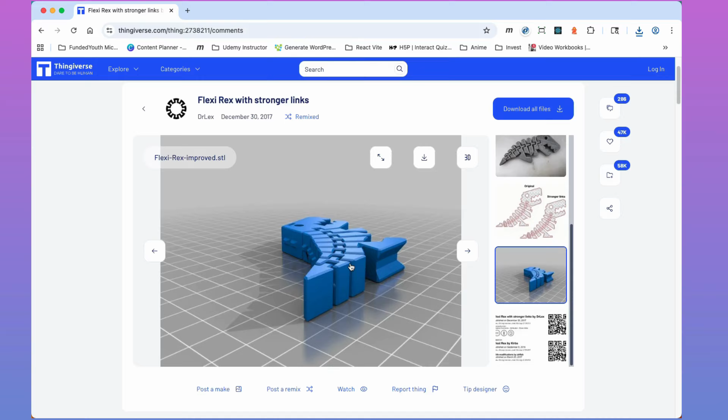If all it has is a 3D rendition of it, be very cautious, because you have an 80% chance or higher that it will fail. We've had people come in, print, and say 'oh, I like this cool-looking Groot character.' They printed it, and a couple days later they came back and it was basically a ball of stringy hair.

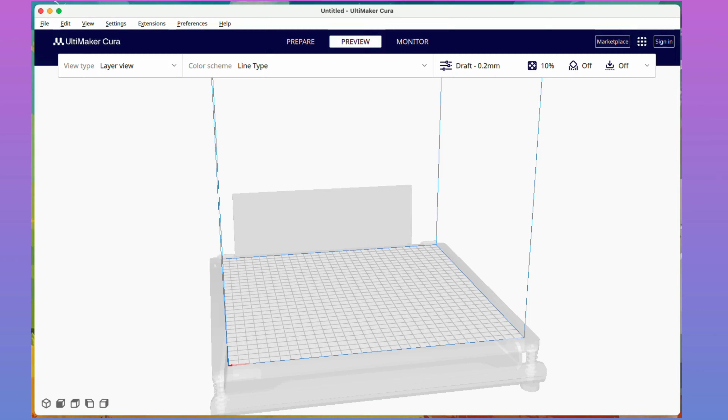Okay, now that we've got this downloaded, let's jump over to Cura. I've got it open already, and my target printer for this example is the Sovol SV06 Plus at the makerspaces - those are the open framed ones that we have available there.

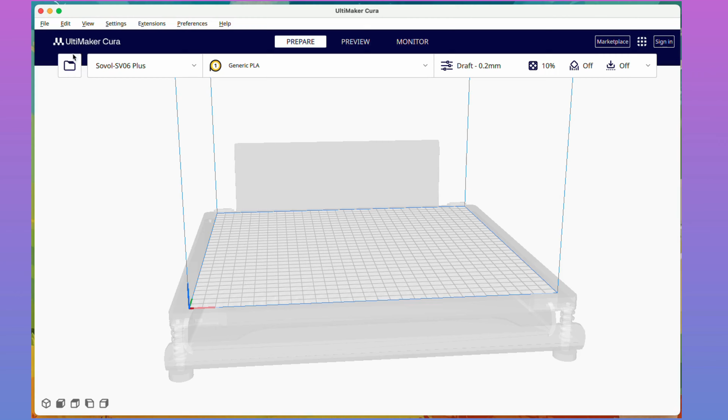Once you're here, you can drag a file onto here that's an STL. You can go up to the file and say open files, or you can click on the folder, which is usually the easiest way of reference, and find your file on the computer that you downloaded. So here's the Flexi Rex improved, I'm going to open that up.

The next thing I'm going to do is for the makerspace - the makerspace alone, you don't have to do this if you're at home, this is just for the makerspace. Just click on the little edit here and put your name in front, maybe include an initial, whatever it may be, so that when we print it, if say the sticker disappears on the machine with your name on it, we know who the print was for.

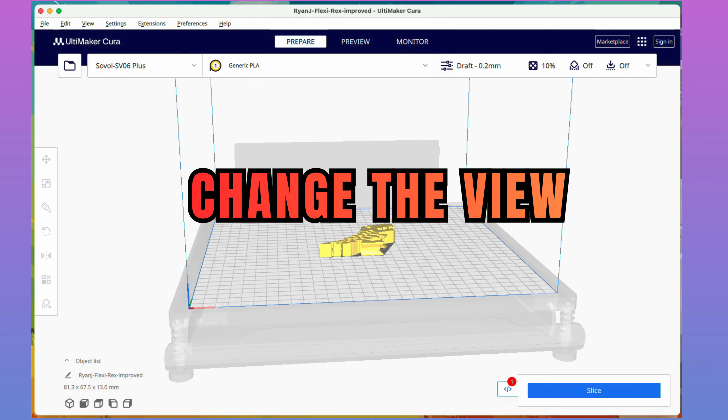The next thing we want to do is cover moving around on the screen right here and rotating, so we can see different angles of the object. There are pre-configured angles from right, left, top, and back. So if we click on any one of these, or front, it'll show us different angles by default.

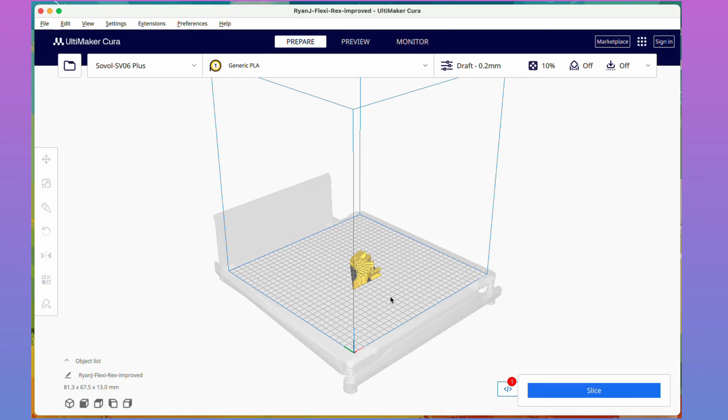On my 3-button mouse, not everybody has this, it's different on trackpads. On my 3-button mouse, if I click on the right button - yes, the right button, not the left click, but the right click - and hold that down, I can rotate around the stage. If I use my scroller wheel, I can zoom in and out. On the same wheel button, if I click on it and hold it down like it's a button, I can actually pan left to right and up and down. If I use my left button, nothing happens - this button is used for selecting the print, which we will do next.

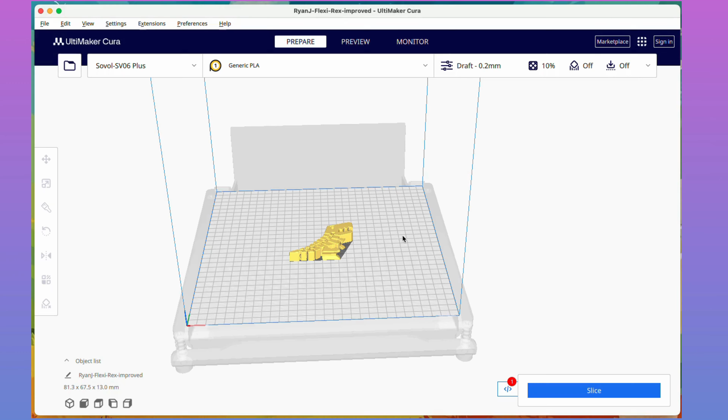Selecting the print, we initially start off with the Move tool. The Move tool has an X, Y, and Z coordinate, and it color coordinates so you understand where it's moving. Notice by default it has the drop-down model.

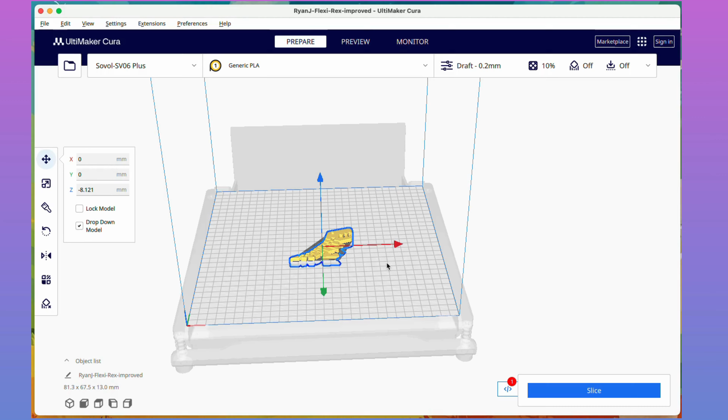What this means is if I take this on the Z axis, it will drop down to the plate, which is good. In most cases, that's what we want. However, if we drag it below the plate, anything below the plate will not print. So I'm going to undo that. And it didn't let me. I actually need to drag it above.

You can change it by millimeters, and you can lock the model, so it can't be moved. I don't know why you would do that in this case, but there's other reasons you might.

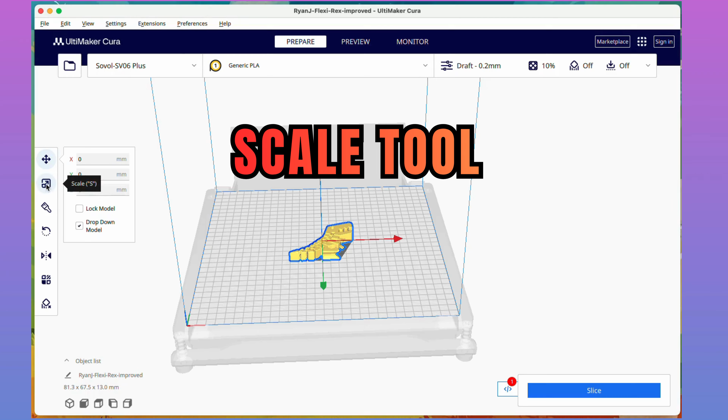The next thing we want to take a look at is the scale tool. As you notice, as I hover over this, there are shortcut keys. So we're going to click on that. By default, it has uniform scaling, so everything scales proportionally. X, Y, and Z all stay the same. It doesn't change in size in any special thing.

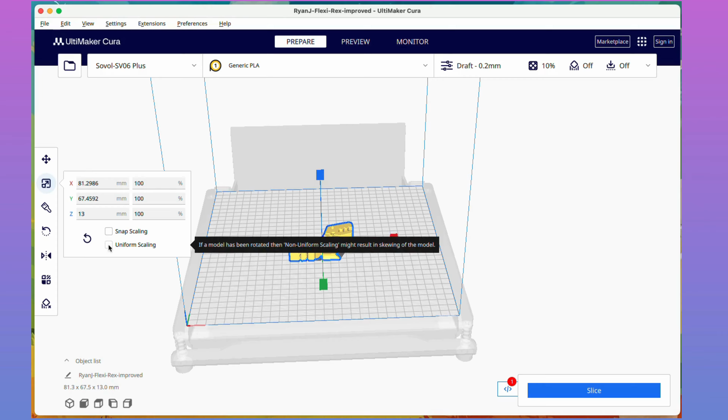For a flexi model, I would not recommend turning off uniform scaling, but you can do it. Notice I can flatten it, but this has changed, so it actually might have issues if I print it like this. So be wary. There's no guarantee it will print correctly in the way it was designed if you modify and squash it and move it around. Just be aware of that.

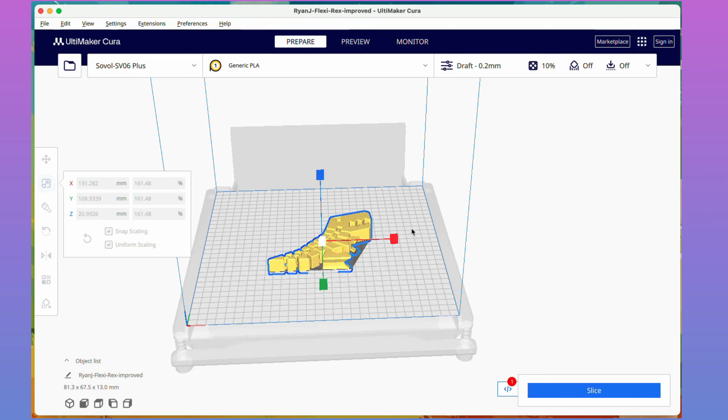You can change the percentages in here. Snap scaling - I'm going to keep the uniform back on - basically think of it as scaling to these squares based on that size. So when I scale out, notice it locks it at little jump intervals. If I turn it off, we have much more smooth scaling on this.

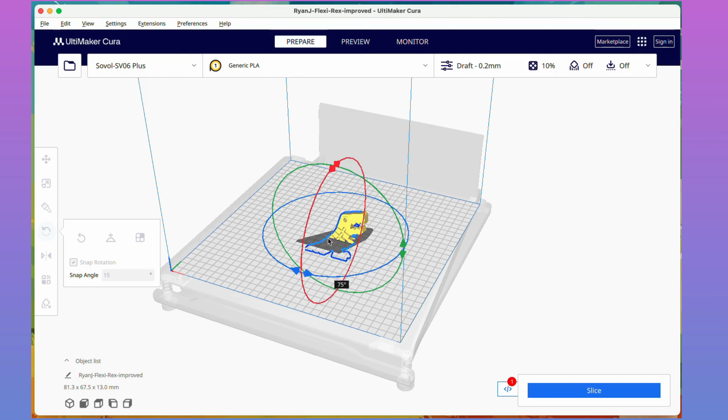Now let's jump over to our rotational tool. On the rotational tool, we can rotate X, Y, and Z, the same thing. So I'm going to rotate around so you can see this. Right now it's rotating at 15-degree angles, which is what we have over here. You can actually either set that at 0 or turn that off if you want more of a smooth rotation.

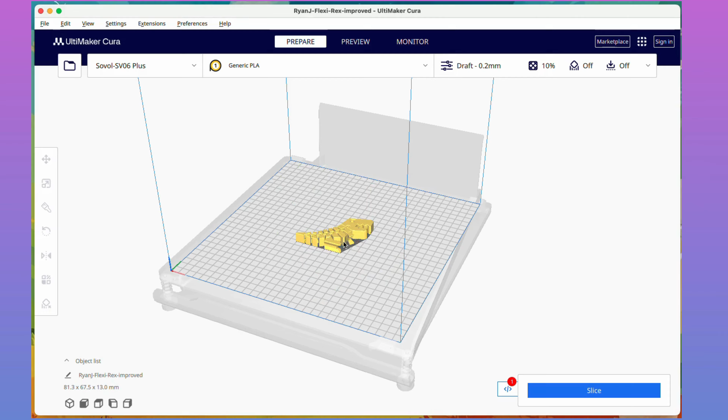Next, what we're going to take a look at, let's actually rotate this, and let's click on this one, which is lay flat. So it infers where's the best way to lay flat on this. Let's say we did it right here. Notice it stands it up. So I'm going to undo.

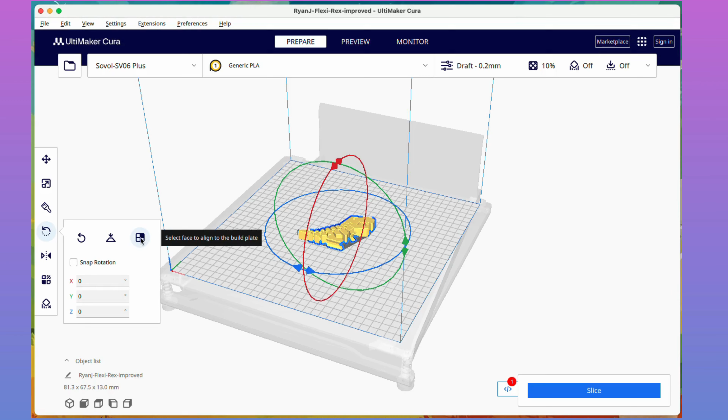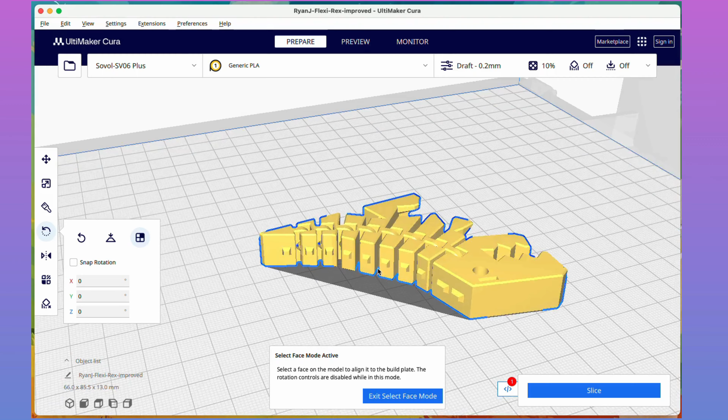The next tool on this rotation is align to face. So wherever we select this on the face, it will move it onto the print or the build plate. There we go. Sometimes it doesn't like me. There we go. Okay, so that's the basics of rotation with snap rotation.

Finally, mirror. In most cases, you won't use this unless you need to invert something, or possibly you built half of something and you need it, rather than building two parts of it like a face, you could just mirror it and print a symmetrical face. That's a good example, whatever that might be.

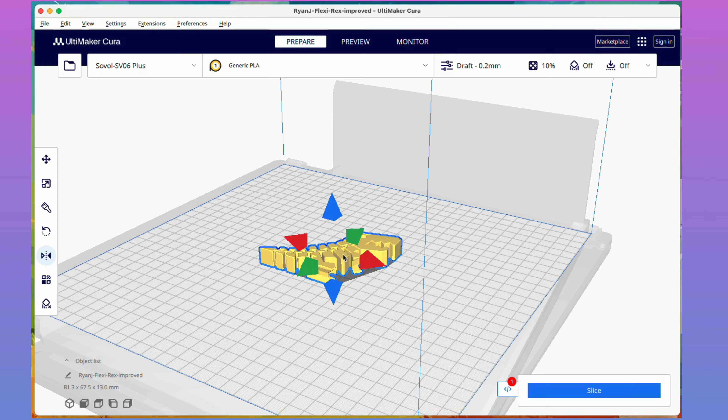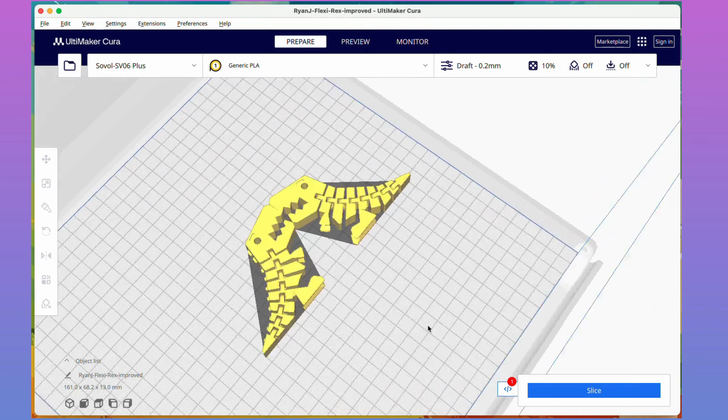Or I could have two dinos that look like they're - let's see here, if I right click on this and I say multiply by 1, okay. I could take this, rotate it, then move it. And I could do something like that, a dino bridge. All right, next.

Let's take a look at our slicing tools. So if we don't even need to select this, let's just zoom in - that's funny - and let's click on slice.

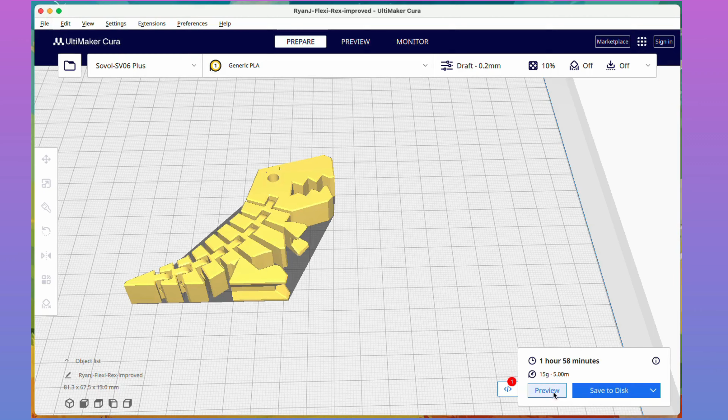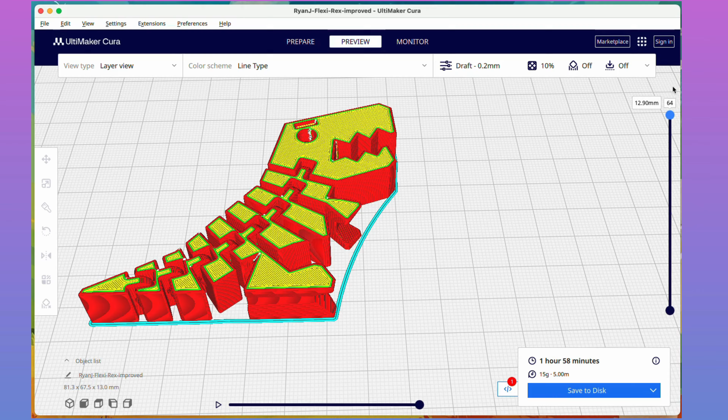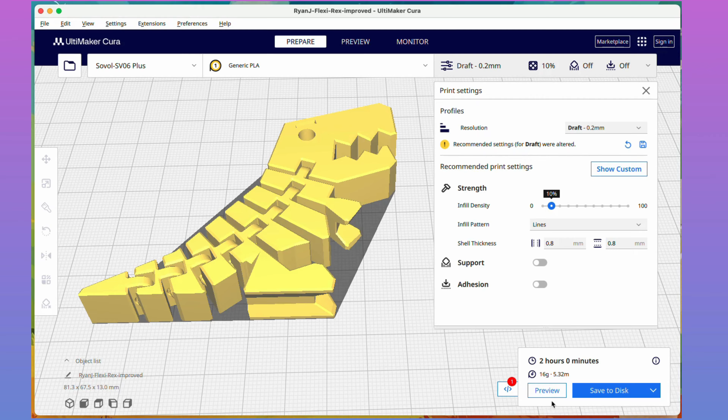We're going to click on the settings where it says draft right here, and we're going to change this from gyroid. Just as the example, most cases we actually would recommend you keep it at gyroid, but the reason why we're going to do lines is so you can see what 10% infill density with lines looks like. Remember, it was a swivel beforehand. Now if we click on preview and we change our layer lines, notice that it's actual lines here instead of swivels.

Now if we change this from 10% to something like 40% and slice again, this will change how much material is inside. In other words, the infill and how dense it is, infill density.

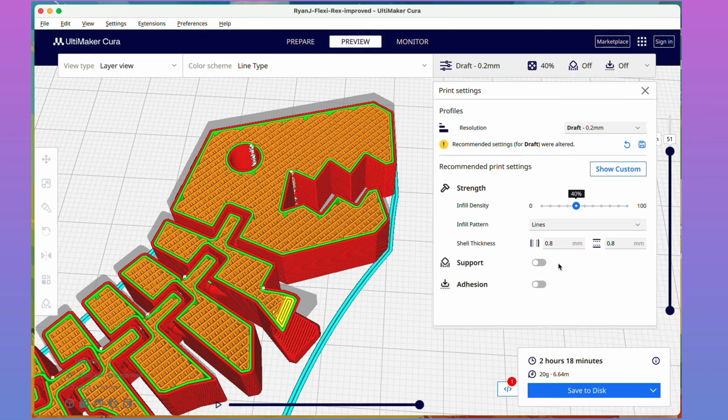The next thing we'll take a look at, we'll jump this back over to 10%, is we'll look at adhesion. So by default, in the basic environment, not the custom. The custom gets a little bit more advanced, so let's take a look at preview. There's a lot more going on here, and I haven't even revealed all the stuff that can be revealed in this, but we'll stay in here for now.

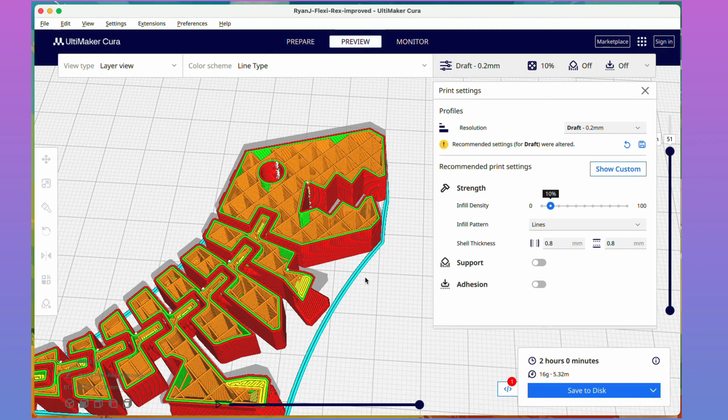This little outline that you see on the print is called a skirt. This is really good when you're printing something that's like a flexible piece, and it needs help adhering to the plate, so when the printer head is moving over and printing it out, it doesn't shift it funny. It just keeps it connected together. Not always needed, but it's good to have, at least on the Sovol printers.

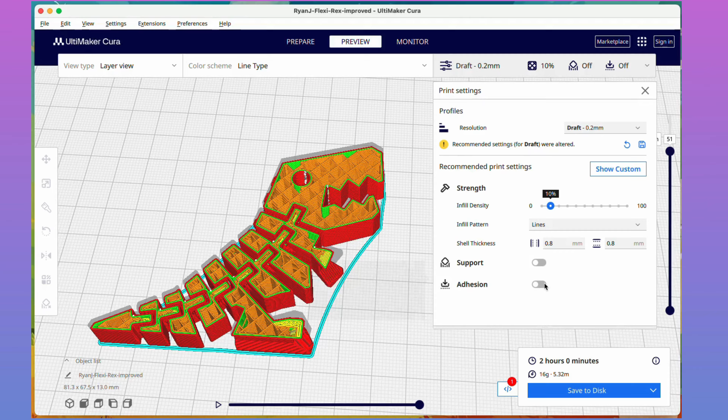Now, if you turn on adhesion and we slice it again, we get something called a brim, and this gives more adhesion. This is really good when using supports or when we definitely don't want something to move around, that we feel like it will move around.

I printed something the other day, a vase, however you'd like to pronounce that, and out of nowhere, it did not have enough adhesion. Well, it was 70% of the way, and it kicked it off the printer, and I lost that print. So in some cases, brim is very acceptable and very much needed.

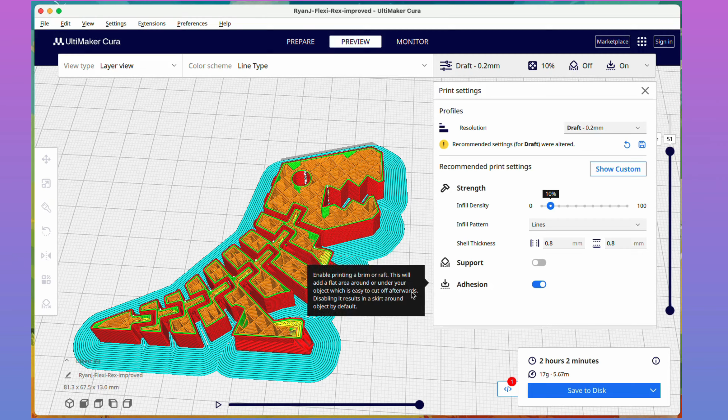For example, if we rotate our dinosaur, we come back to prepare so we can actually experience supports. I'm going to take this, rotate that, let's say like this. We got it up to our 90 degrees or close to it. And let's say supports, and we'll say normal everywhere. And we'll say slice.

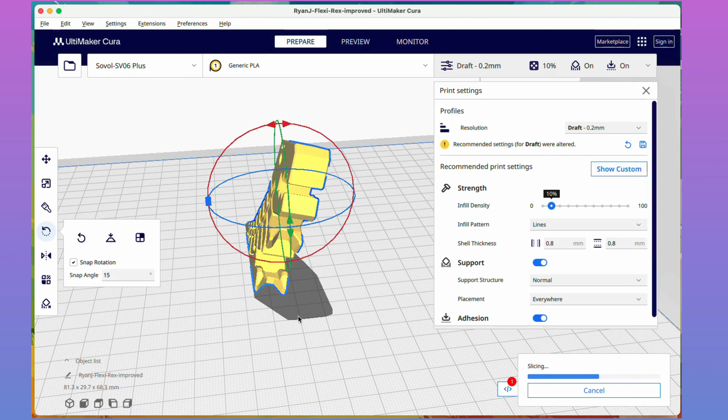And we add preview. And so what everywhere is doing with normal is it's giving us these vertical lines so that it does not fail when it's tilted. It adheres to the brim, so everything stays in the same place and doesn't get moved.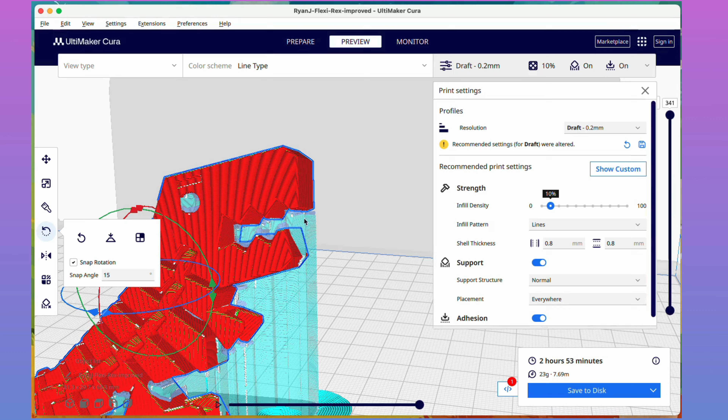And then it also puts this support breakout that we will actually break out once it prints in the eyeball, in between the teeth, just to make it stable, but it makes it a lot harder to pull apart. Not always the best. We actually recommend tree, but let's take a look at what touching build plate for normal looks like.

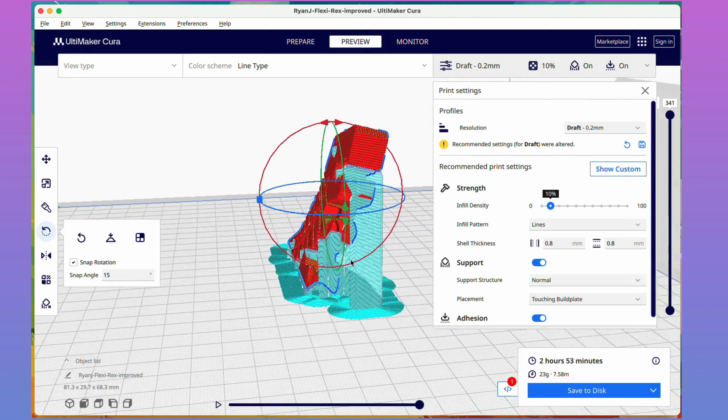Well, that looks like it actually did the same thing. Okay, sometimes what would happen is we would not get it inside the mouth itself when it does just touching build plate. I wonder if that makes a difference for...

Ah, yeah. Notice how instead of inside each of the teeth, it's just doing what's from here underneath the build plate. So the eye doesn't get it, the teeth don't get it.

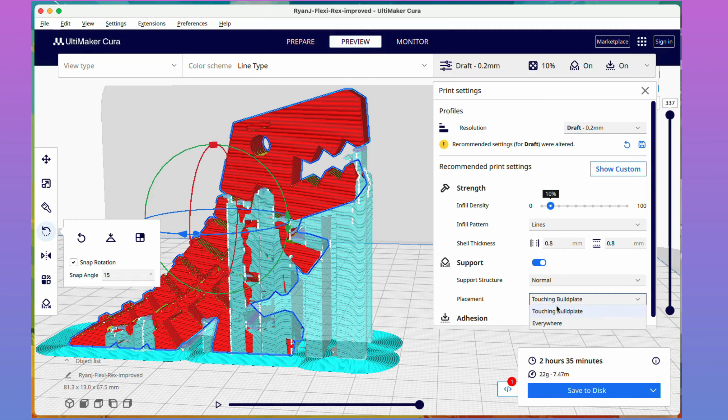But let's switch over to everywhere and then tree. So a tree looks exactly like you would imagine. It's a tree. Tree trunks come up and out and build everywhere they can. Notice that the tree doesn't feel a need to print here, but it does inside the teeth.

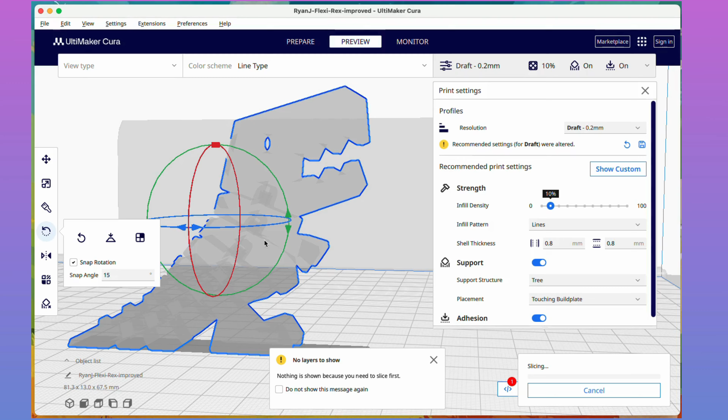Now, if I say touching build plate only for the tree, and we actually do recommend at FundedYouth that you do the tree in most cases, notice it actually gives you less where it's actually printing, but still the tree kind of touches everything. That's just the way the tree works.

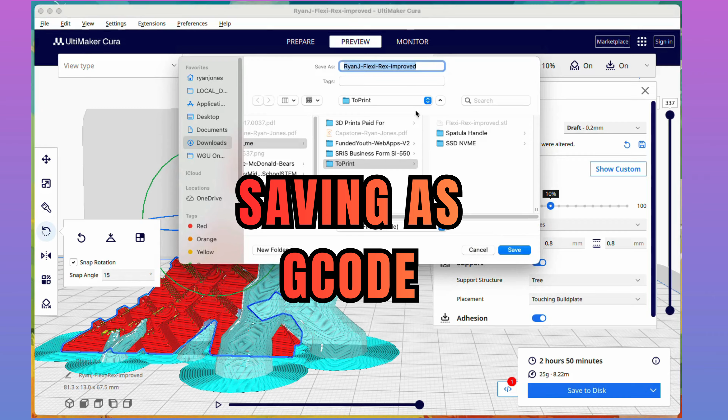Final point is when you're ready to print, you click Save to Disk, wherever you're going to save it. In most cases, it would be the micro SD card that you attach, and then you'd make sure that it's saved as G-code. This also, as you can see, lets us save it as different file formats now.

This used to not be available in Cura, but the newest versions have allowed this, and you can do it as 3MF, but you want to make sure it's in G-code. You'll go ahead and you'll save that, and then you can open the folder.